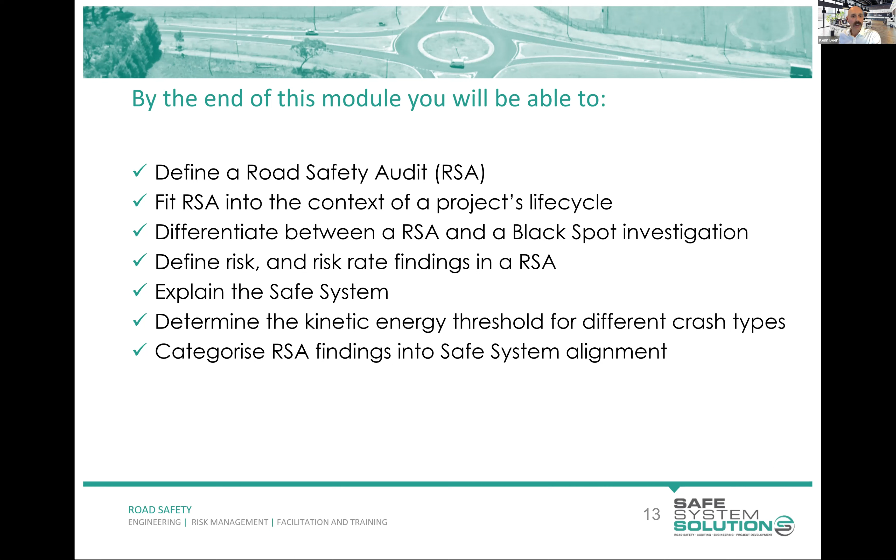Yeah, we're going to get into a bit of risk rating in road safety audits, and talk about the safe system, which I don't need to spend long on with this group because we have had a good discussion with many of you about that, and New South Wales government's done a lot of work to get safe system theory out there. But we do need to delve back into kinetic energy thresholds and management in road safety auditing. So we'll just recap some of that.

Okay, so this course is based on the Austroads Guide to Road Safety Part 6. There was a release of a new Part 6 last calendar year, late 2022. I was the technical advisor to Austroads on that document. And so we did reshape a fair bit of road safety auditing practice, and it's filtering into New South Wales practice and supplements for New South Wales. And I'll take you through the process in its contemporary form.

There are lots of old superseded ones. You may have them around in your offices, although most people are paperless office style these days, but you might recognize some of those documents.

So this course meets the Austroads requirements for a road safety audit course in terms of the content we cover, and as I mentioned, has been approved by Transport for New South Wales and Queensland Department of Transport, Victorian Government, and South Australian Government as well. So you will, with successful completion of this course, be eligible to be a registered road safety auditor across any of those jurisdictions, and I'll explain that later.

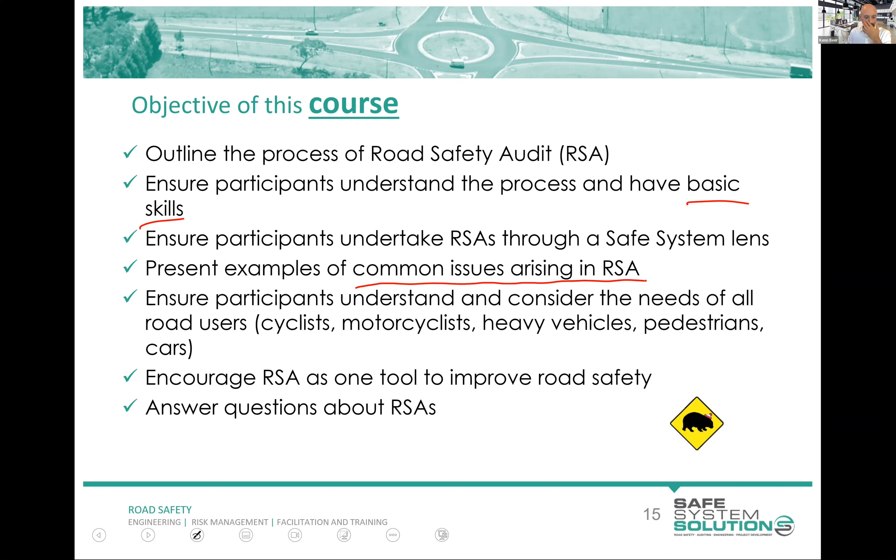We're going to think about all road users: cyclists, motorcyclists, pedestrians, cars, heavy vehicles, scooters, people in wheelchairs, the lot. We're going to think about all of our road users. And we're going to encourage road safety auditing because it is a great tool, and we're going to answer your questions, and we're going to talk a little bit about auditing as one option we have in the wide spectrum of things that can inject safety into our projects or our existing roads.

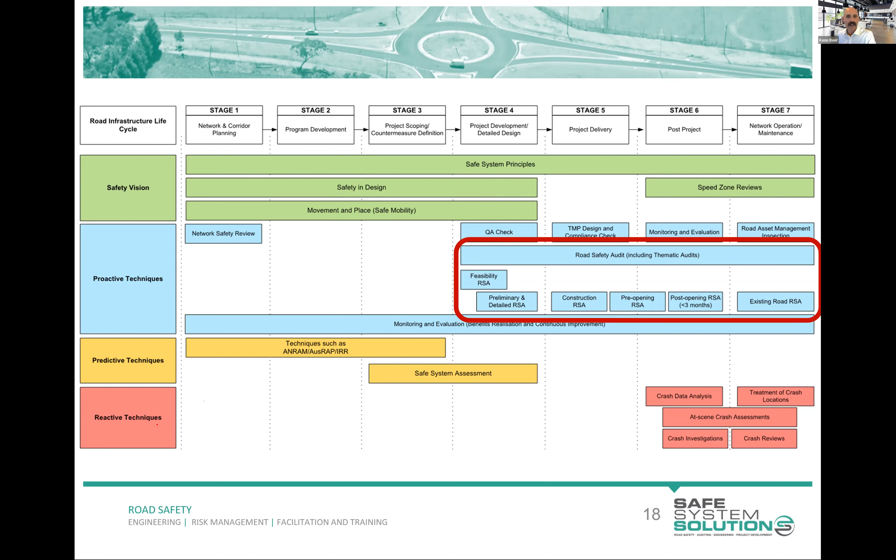Okay, so road safety auditing sits within this proactive technique, and we're going to run through a fair bit of that. Now, I've got a group here, and I know some of you have quite a bit of experience and knowledge in road infrastructure planning and management and design and the like. So some of you will be aware of this, but it may be a little bit new if people are new to the idea of road safety auditing.

A road safety audit is not a standards review. So the word audit naturally conjures up images of financial audits and these sorts of things, doesn't it? And this rigorous check of compliance with the documented standards or codes. But that's not what a road safety audit is. A road safety audit is a holistic look at safety, regardless of whether we conform with standards and guidelines or do not conform with standards or guidelines.

And the reason for this is really, I suppose, this. Standards do not necessarily equal safety. So meeting the standards and guidelines does not necessarily guarantee safety. Why is that? Well, one reason for that is that our standards often have risk built into them for one reason or another. Okay, so there's that. The second one is that standards and guidelines come together out there in the real world, and the combination of standards can present a risky scenario. So you may have one thing that meets standards and another thing in there that also meets standards, but by those two being in there, we get a dangerous situation.

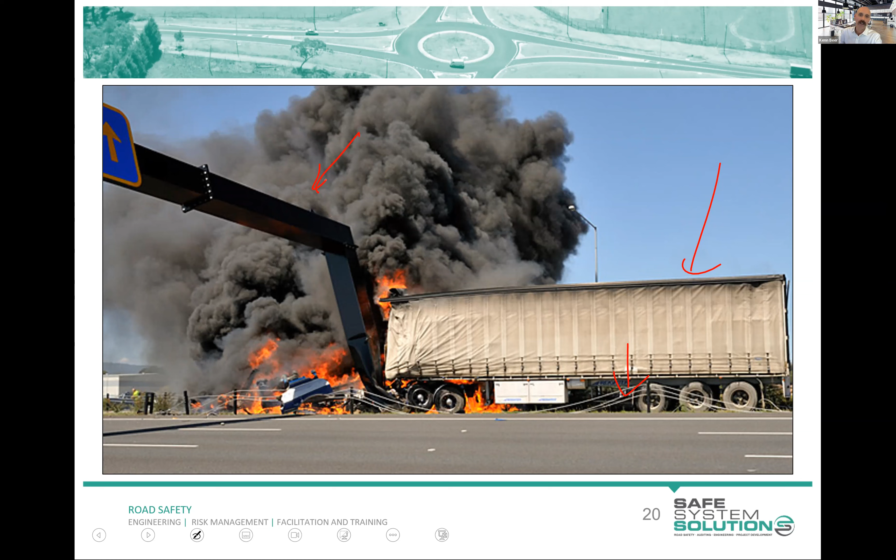Now, things like this flow on. So since this incident, there have been changes to guidelines. That takes many years. And we do now have some upgraded standards and guidelines around this. So hopefully we won't see designers designing this, but you're going to be there as auditors to try and pick the next ones. So that's actually the test vehicle there. That's the large vehicle that crashes into the wire rope system.

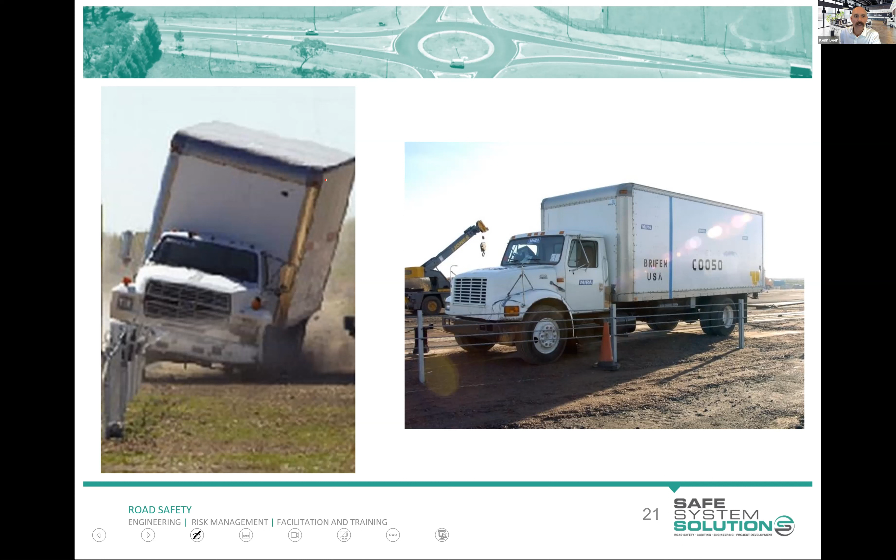Let's have a look at another one here. And this is, I should say, choosing the wrong containment level or an inappropriate containment level for a barrier system is quite a big finding in a job with barrier systems.

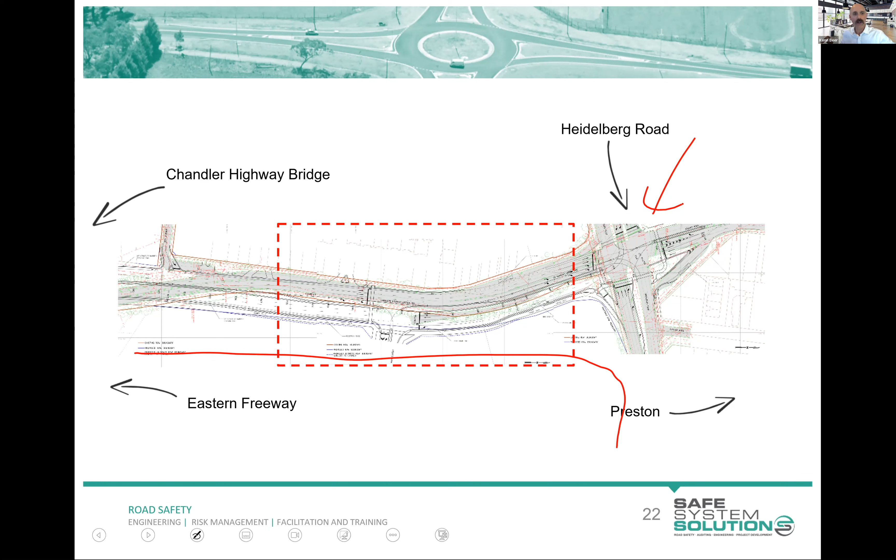And I'm going to zoom in a second. Here we've got an intersection up here, existing. We've got a bridge down there. There's a new duplication coming in as well. So let's zoom in. And this is a new signalized intersection being created into this development. And so this is how it's all being designed and set up.

This is a car. So let's have a car driving along in a 60 km/h environment. Maybe they're going a little bit faster than that, and they continue on straight because they want to go straight, and they're in a turn lane. Okay, so this is what we call a trap lane, and some of the naming of features, I think somebody deserves awards for these, because trap lane is the most perfect description of what that is.

And you're driving along, and all of a sudden, the lane you're in, where you just want to keep going straight, turns into a turn lane. We absolutely know that we're going to have rear end crashes and side swipe crashes occurring along here, as people attempt to get out of their lane at the last minute, attempt and then can't, and then crash into the back of a vehicle. We know this.

The Austroads guidance and jurisdictional supplements do not quite go to the point of absolutely mandating you cannot have a trap lane on the network. Trap lanes, they're discouraged, but they are there. Very occasionally, a trap lane is intentional, that you want vehicles to make a turn, but that's almost never.

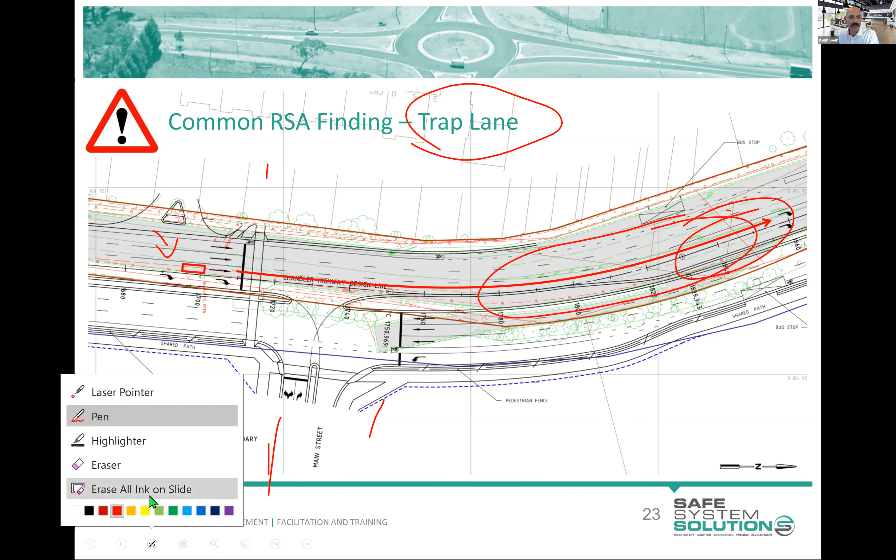So here's another example of where we as road safety auditors play a role at, one, identifying the issue, but I'll tell you now, the designer would have known that there was a trap lane. So it's not going to be a revelation to them that you've identified their trap lane. But what we have there is the ability to risk rate and to help with ways to hopefully lessen this risk.

And as a road safety auditor, I'm always understanding of all of the constraints and challenges that the designer and the project manager have, and it's a huge challenge. You're trying to design something like this, and you're going to have cost issues, traffic modeling challenges, land acquisition challenges, services to deal with. You might even have cultural heritage, native vegetation issues, and the list goes on. So what we're here to do is provide advice, identify issues, and try to help the designers and the project managers along their journey of identifying risk.

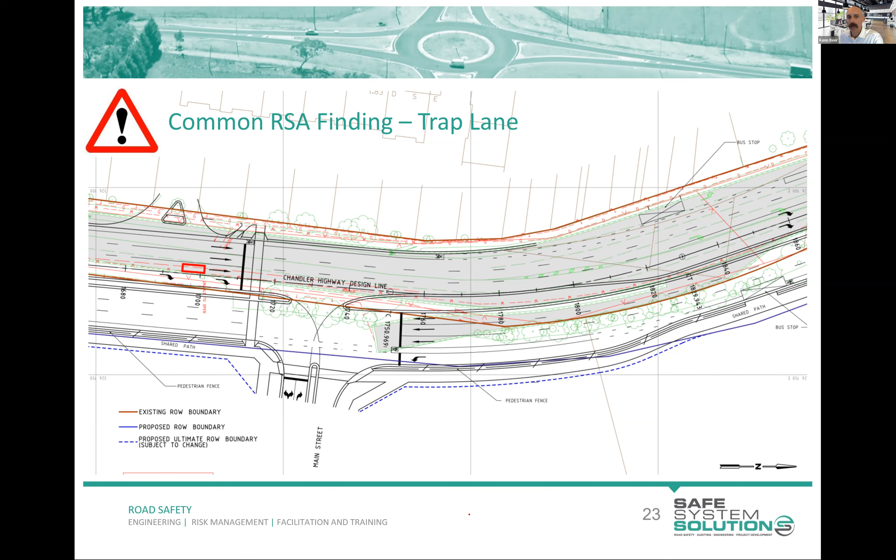Okay, I'm going to play a little video here, and actually this is probably not going to play on my computer, so I'm going to stop sharing that, and I'm going to jump out to another screen to share. Oh, you're going to get it. That's not what we want. There it is.

I'm going to play a video here, and it's of a crash that occurs. What I'll be asking you to do is have a look at the road and roadside environment and tell me things that may have influenced the chance of this crash happening. So that's in the physical infrastructure around and the surrounding environment. I'll play it a few times. I just want you to start to think a little bit like an auditor. What do we got built out here that's causing some of these challenges?

So hopefully that banner will drop away. Okay, we'll look at the back of a dash cam. We'll go to the front in a second. I'm going to play it again, just so you're able to watch it a few times. Hopefully it's streamed through for you.

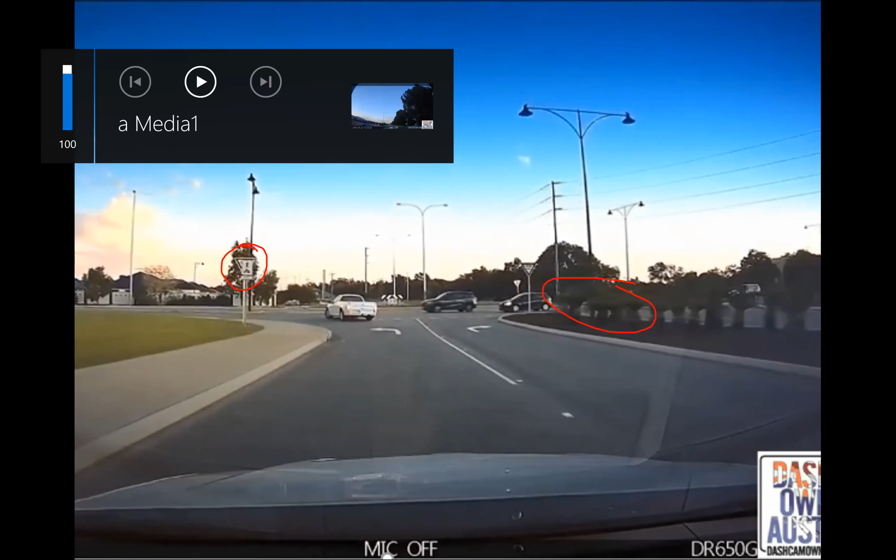What's the color of it? It's dark. Sorry, what was that? It's black, isn't it? Color. It looks black in comparison. The one in the vegetation is black, but the others are silver. Oh yeah, yeah. So it's a different type of lighting system, it looks like. So I think that, yeah, we'll have a chat about that one shortly.

Something in the chat has sparked my interest from Dan. It says gives a perception that the road continues straight. Now that is, I suppose, a road safety audit style thing. Everything that's been said so far, road safety auditors will absolutely pick up. But the visual deceit of this intersection, and visual deceit is a term we use quite a bit as auditors, the road has the characteristics that look like it continues on through.

The presence of the lighting and the power poles in their continued run down here is just accentuating what a road user will never be able to articulate to you, but is in their subconscious, that this road continues straight without control. And they may recognize that late. So I feel there is a chance that this white ute driver recognized too late that at this intersection they actually had to give way. Maybe they thought it was further on, or the configuration has made that an overshoot issue.

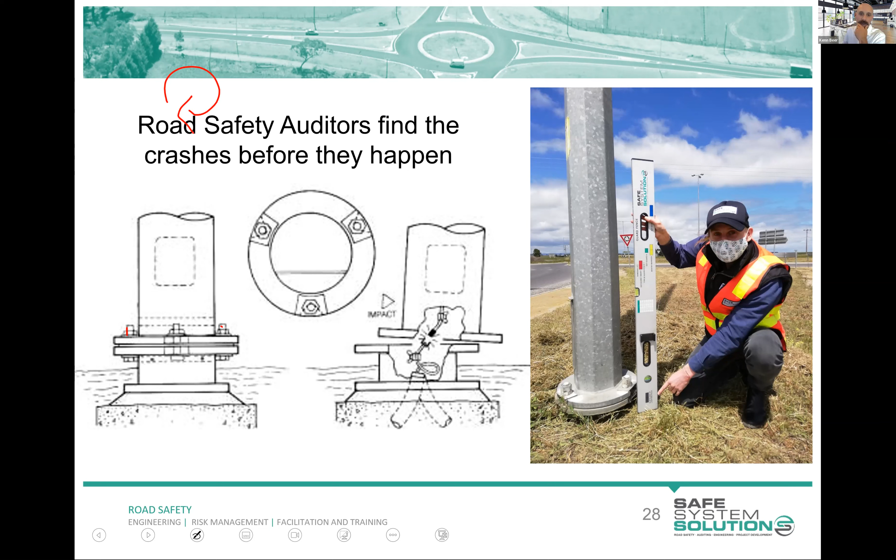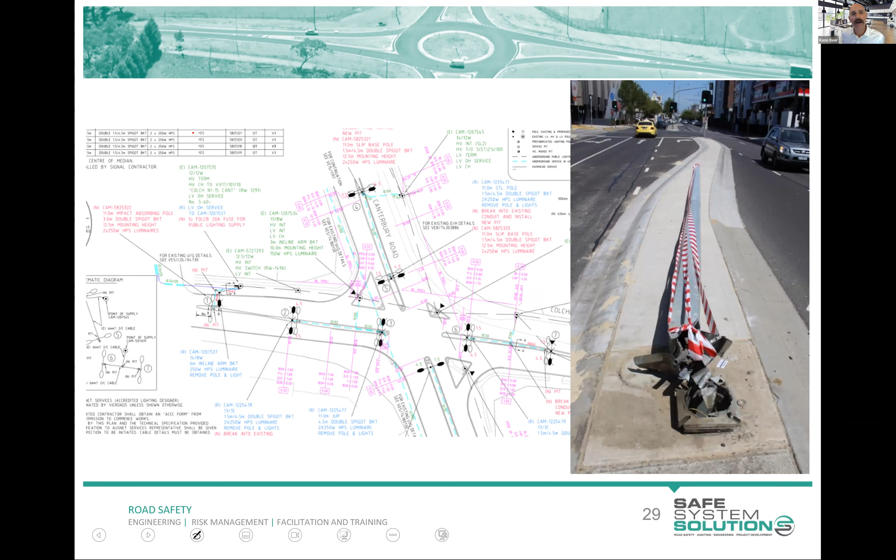And as a road safety auditor, you may get plans and designs that have lots and lots of technical detail, and you might get the lighting plan, and it might have a whole lot of new light posts and poles going in, and some of them may be slip-based, some may not. And you're determining, is that appropriate or not? Now, hypothetically, if they were to put a slip-based pole here, and you were looking at this as a design, not an existing road, what as a road safety auditor might you say there?

I mean, they're obviously trying to lessen risk by making it a slip-based pole. So if a driver leaves the road and hits that, it breaks away and it doesn't send all the energy into the vehicle. But has anybody got any thoughts on, as an auditor, what you might say to that? Well, the top broke off and that created another hazard in itself. So the structural assessment of that pole hasn't held together. So all good designing half of it down the bottom, but you look at the whole picture.

Yeah, that was an interesting one in that video, wasn't it? I've never seen a slip-based lighting pole that has that configuration. So I don't know whether it was intentional or unintentional in the design, but it was very interesting. I'll agree with you there. Certainly in most slip-based poles, you wouldn't have the top do that.

Okay, so Bridget is on the board there with a good one. You can have a prize for the idea of, what about if it falls onto power lines? Or what about if it falls into areas with high pedestrian activity and the like? And I see a few people have added to this.

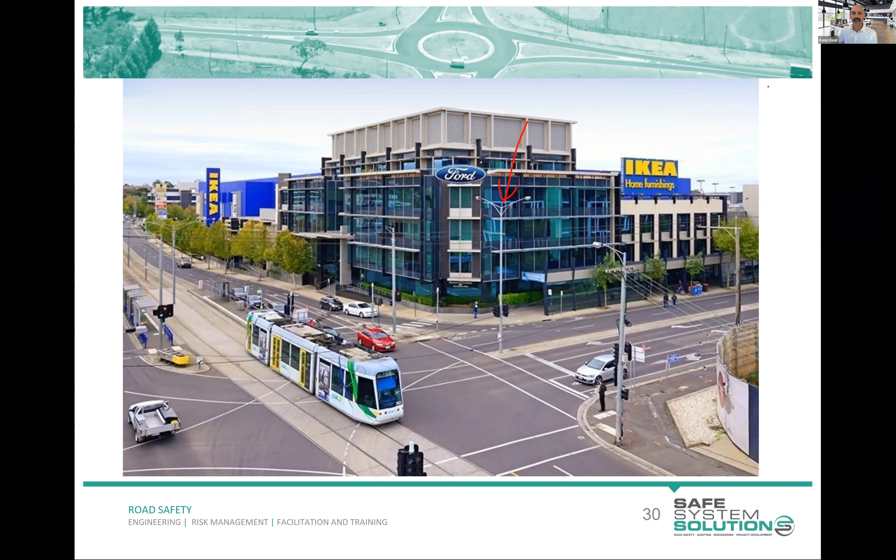And there is another type of pole that we categorize within the suite of frangible poles. And it's a lighting pole. There it is. Actually, I'll give a prize if anybody can tell me what the name for this one is. So I talked about slip-based. And remember, these are both types of frangible poles. And this one is... Yes, collapsible is a good guess. It's actually termed an impact absorbing pole.

And they also are frangible, but they contain a vehicle with an envelope, and they don't quite operate the same way. It's a bit more of a contained crash. And then you're moving into rigid poles. So the rule of thumb is: low speed environments, rigid poles, fine, especially if there's pedestrians around. In medium speed environments, these are the better option for that containment, and in high speed environments, slip-based poles.

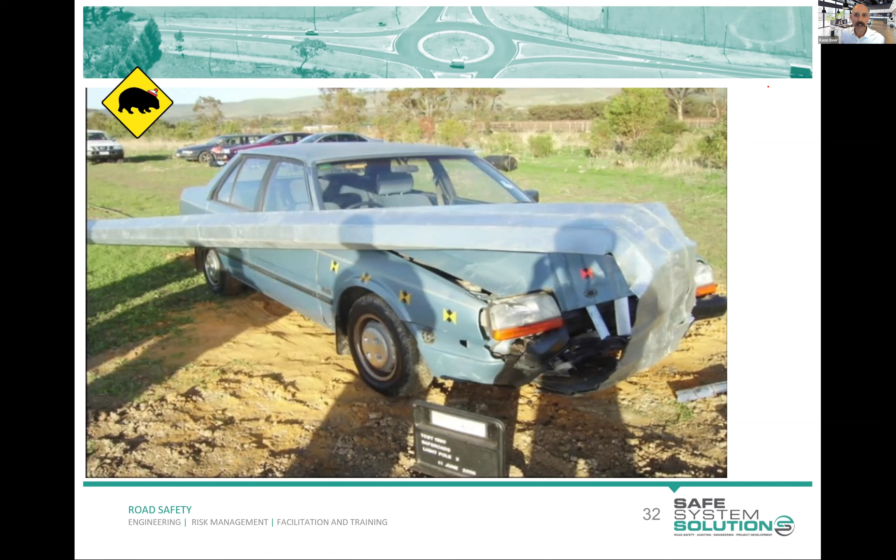And as a road safety auditor, this is a common thing that comes up. So thinking about where they will fall as slip-based ones. And then, as you can see, Max, one of our senior road safety auditors there, doing a post-opening road safety audit of a newly constructed roundabout. Checking the height is an important thing as well for existing ones, because if they're too high, vehicles will snag on them. They lose all of their benefit.

It's not going to shear. If they're too low, it's not as bad, but it just doesn't get as much shearing as we would like. So having a look at that specific height and checking it within the tolerances is an important thing. So you may see a few of these pop up in the slide notes. And in the learning management system, you have a PDF copy of these slides, and you could click on that and get a little bit more information, sometimes a video on this specific topic if you are interested.

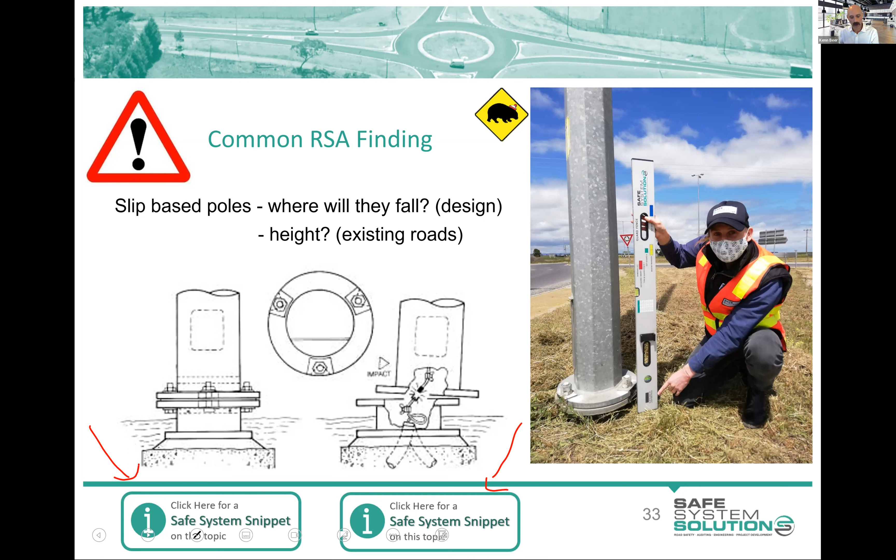So another common misunderstanding around road safety auditing is, I'll just check the chat. I see a couple of things might have come in that I may have missed. Some good answers in there, thank you.

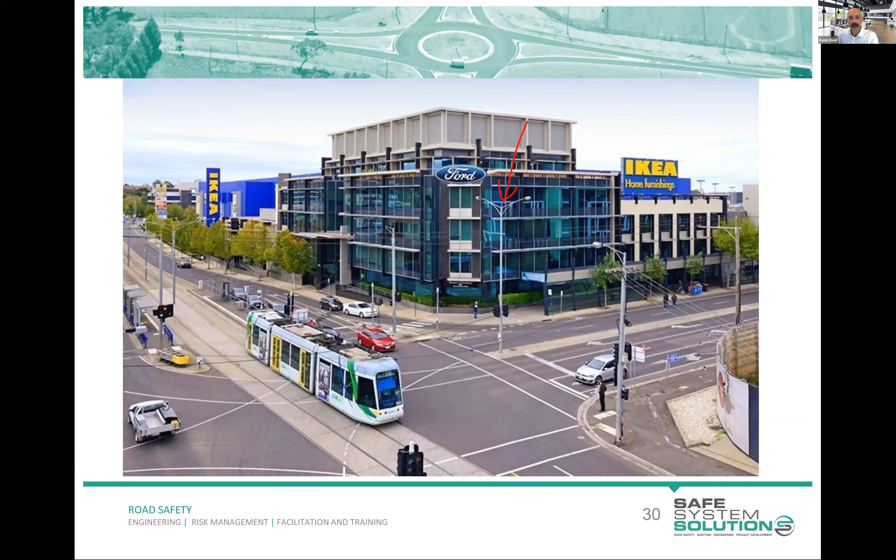Yeah, so wouldn't you add barrier curb? I think that's a decent comment that's come in there around added protection, where you've got the slip lane in an urban environment. It looked like it was a mountable curb from what I could see, and maybe should have been a barrier curb, just for that added protection. Yep, that would certainly add a bit of protection and a bit of redirection as well. So I think those sort of things are good, and that's the details of what auditors can be injecting as ideas if you're in that space.

So road safety audit's proactive, black spot investigation is reactive. If you are analysing crashes in detail and looking for crash trends and doing crash matrices and crash diagrams and all of that, you're doing a black spot investigation. And that is a good process if you have an area with a significant crash history. If you have an area that doesn't have an extensive crash history, or it's a brand new scheme, the crash history is somewhat irrelevant.

So it's currently a give-way controlled intersection and you're making it a roundabout. Question that comes up is, well, what relevance is the crash history then? Because we're trying to think about when it's a roundabout, what are the issues and what are the crashes? And the question often comes up, should you look at crash history as part of a road safety audit? And the answer to that is, it is up to you. People often don't like that answer, but it is up to you. Because Austroads doesn't suggest one way or another, nor do any of the jurisdictions really. It's just how you want to operate.

But what everybody is clear about is that it shouldn't be driving your identification of risk. Because if the crash history is driving your identification of risk, then you're doing a black spot investigation or a crash reduction study or the like.

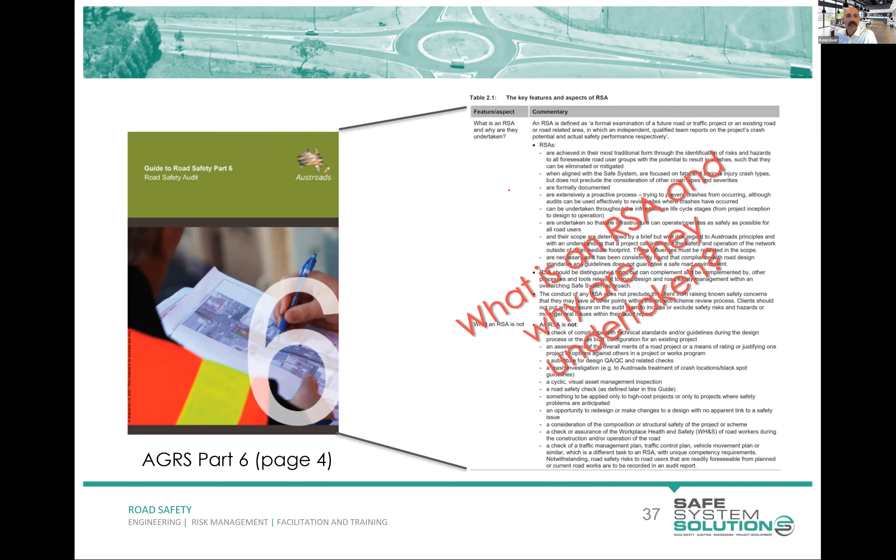What is a road safety audit? I'm going to move through some of these slides a little bit quicker to get us to a point where I can give you a little assignment to do. The Austroads Guide to Road Safety Part 6 defines it with a whole page of text, which I'm not going to read to you. What I want to take out is this. A road safety audit is a formal examination of a future road or traffic project or an existing road or road-related area in which an independent qualified team reports on the project's crash potential and actual safety performance.

Some pretty important words in there. Formal, okay? This is a formal process. You go through it, you follow the steps, and you use established documentation, protocols and the like. We can do it on future or existing roads, so designs, or the existing road environment, or road-related areas. So it could be shared paths, it could be car parks, these sorts of areas as well.

You need to be independent. By independent, we mean you can't be the designer, you can't be the project manager, and you can't really be somebody who is overseeing, even at a higher level, these particular projects. But it doesn't mean that you can't undertake audits of roads that you are managing. So if you want to do a road safety audit of an existing bit of Transport for New South Wales roads and gather a team together, you can do that and just follow the process. Or you could do road safety audits of Transport for New South Wales projects as long as you weren't the designer or the project manager.

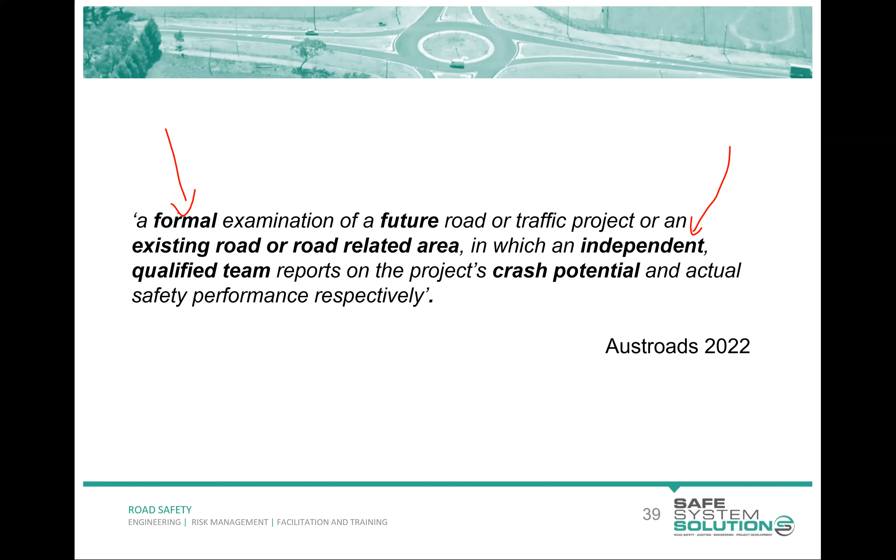Now, Blair's got a hand up on this one. Oh, you just answered it. Even if you're from the same organisation or company, can you do road safety audits on that company's projects? As in, we can do our own audits, but as long as we're independent to that project.

Yes. So this is one where Austroads has always delicately tried to say it, and the latest release of the guide has been a little bit stronger, but I'll just say it the blunt way: for government, local government, state governments and the like, everybody's happy for a Transport for New South Wales audit team to audit a Transport for New South Wales design job, as long as they're not the designer or the project manager. When a big or small ABC consultancy did the design and is also doing the audit, everybody gets a little more nervous.

Now, I generally hope, and I think, that most of these consultancies have the integrity and they're not being compromised in terms of time frames or pressure from other areas. But that one's a little more discouraged. It's generally seen as perfectly acceptable for the road controlling authority to have internal processes and practices of road safety auditing. Okay.

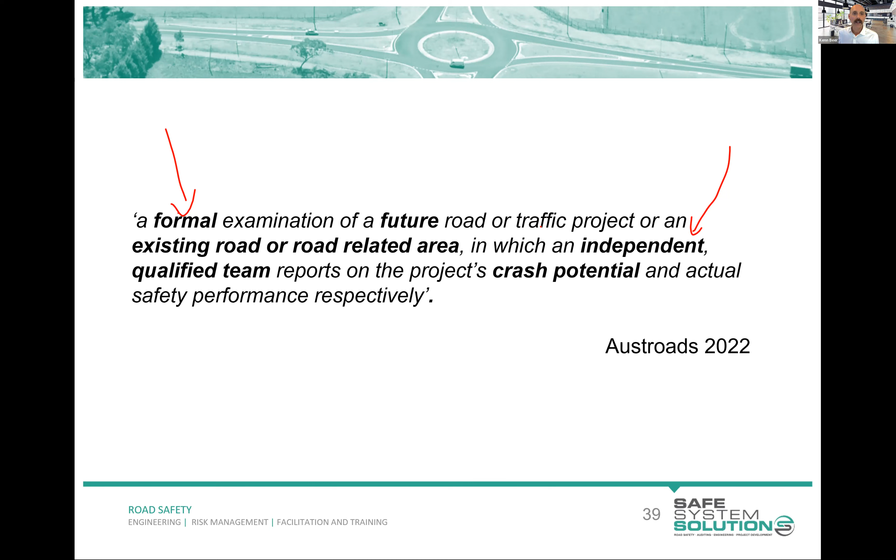So the safe system, and I don't need to spend long on this because you're so aware of it, but we think of safe system principles when we audit as well. A safe system assessment and a road safety audit are coming closer and closer together, because we are obviously thinking about people making mistakes. We're going to try and minimize those through identifying things in designs and in the existing road that cause those and eliminate them. But we are thinking about the severity of crashes, the human body and its vulnerability, and all of our shared responsibilities.

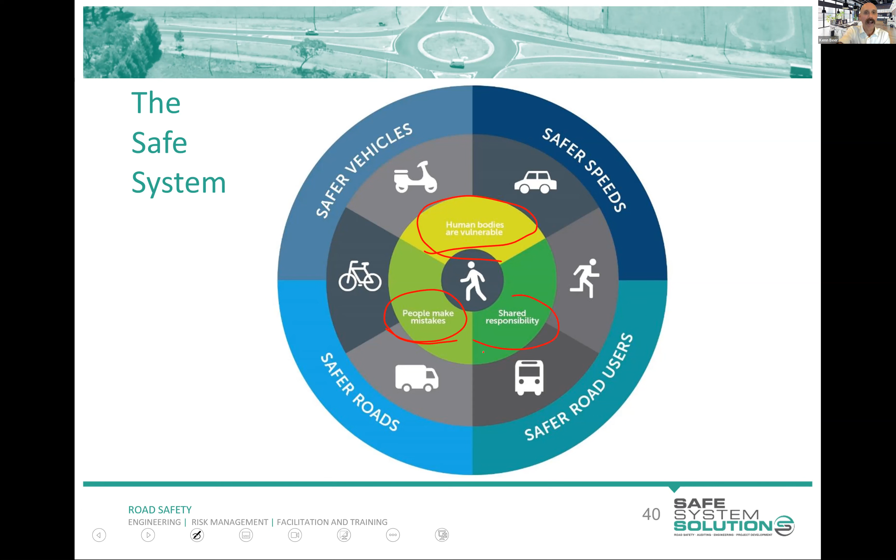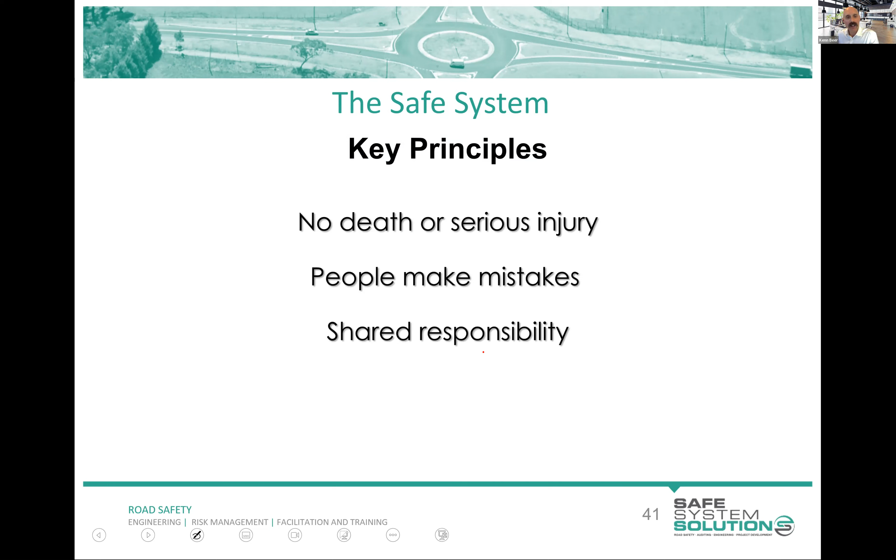So we have that aspiration of no death or serious injuries. We know people will make mistakes. We'll try and minimize those, but we need to manage them as well. We've got the shared responsibility, and people are vulnerable.

Now, I want to see if I've got a quiz here, because it may or may not come up. Oh, gee, it does. Fantastic. Remember, you don't get marked on this, and hopefully that's going to come up on your screen. Tell me if it is not. I've got it. Okay, good.

It's coming up. Now, you're not marked on it, but this is just a little pause for us to recap our thinking. And then the last question you got in the Safe System Assessment course, but I'm asking it again just to see if we are all on the same page still. I'll give you a couple of seconds to do it.

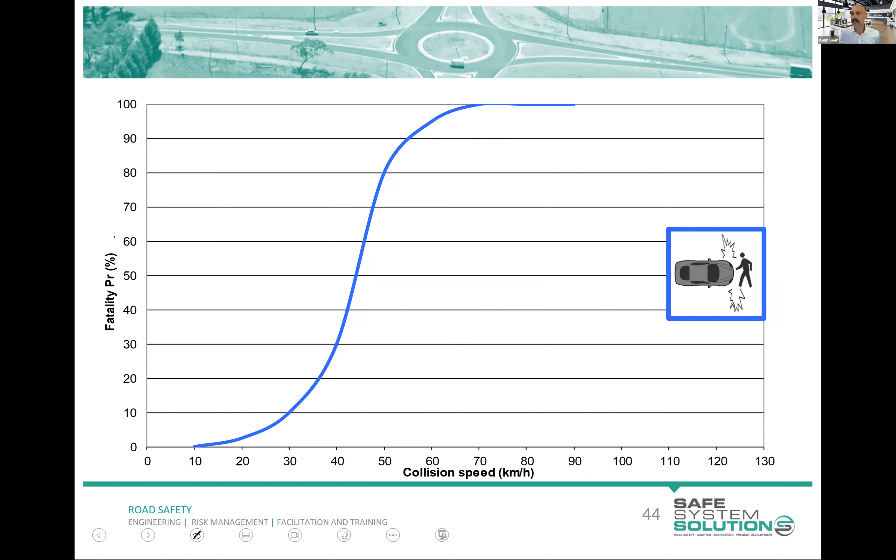Lost my PowerPoint. Clicking along, and that's not going to work either. Sorry.

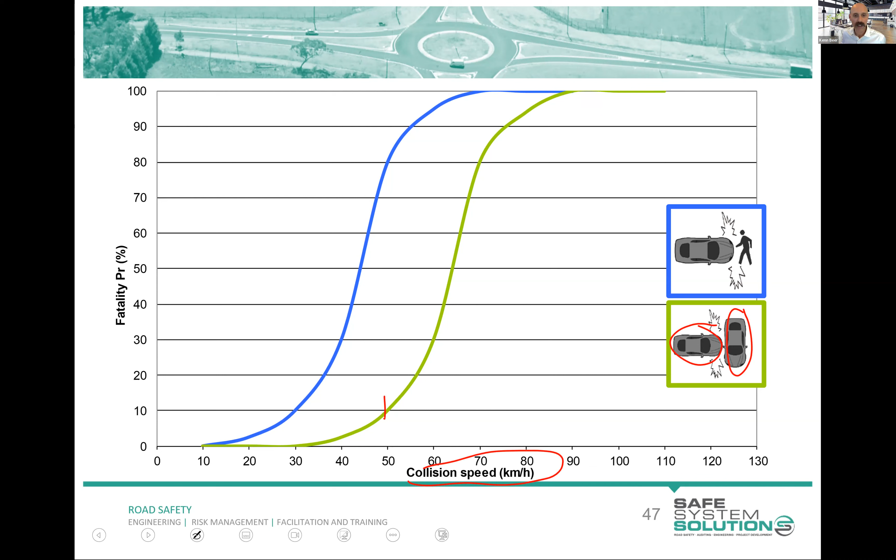I'm going to carry on here because I have taken most of you through this before, and others have as well. We have this information for side impact crashes: bullet vehicle speed, target vehicle, a bullet vehicle speed down here. We see somewhere in the order of 50 kilometers per hour. Things go really bad when that bullet vehicle is going faster than that and hits the target vehicle. We have a dramatic increase in the deaths of occupants there.

And for head-on crashes, we see that 70 kilometers per hour is a real kick-up point in terms of both vehicle speeds. Check out the safe system snippets on this if you want further info and you want to analyze it a bit more. There's some good stuff there.

But in road safety auditing, where we really find ourselves less like a safe system assessment, where we're trying to attribute a scale of 0 to 4 on how severe incidents might be, we do a bit of that thinking, but we also sort of flag these threshold speeds. And that's the 30 kilometers an hour where pedestrians and cyclists are there, 50 kilometers per hour where there's side impact possibility, 70 kilometers per hour where there's head-on ability, and us looking to be below that.

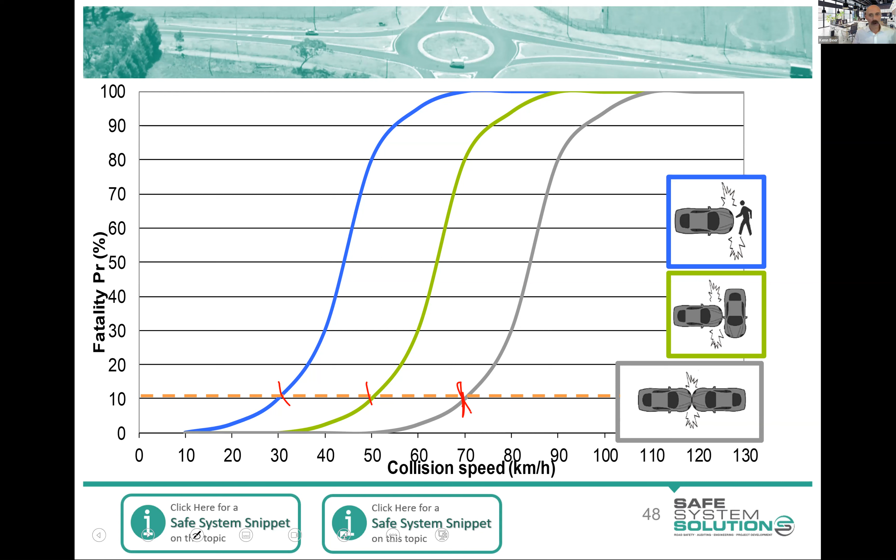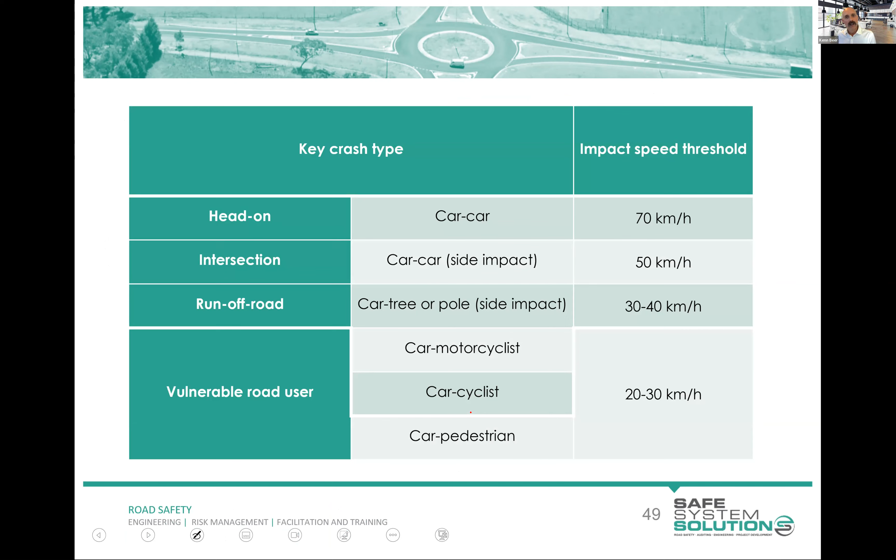And there's a bit more here in terms of impact speeds and the crash types, which may assist you. And I'll give you a little bit of, I suppose, calibration on that. Just putting my little New South Wales disclaimer on that one.

So the old model, which was essentially identify hazards and assess risks, and maybe draw a line there for New South Wales. The new model is identify risks, assess the risks, consider safe system tolerances that we just looked at. And then if you're in a jurisdiction that's making recommendations, you make your recommendations, but you give an indication of how well they will get us to our safe system aspirations and how effective that treatment is.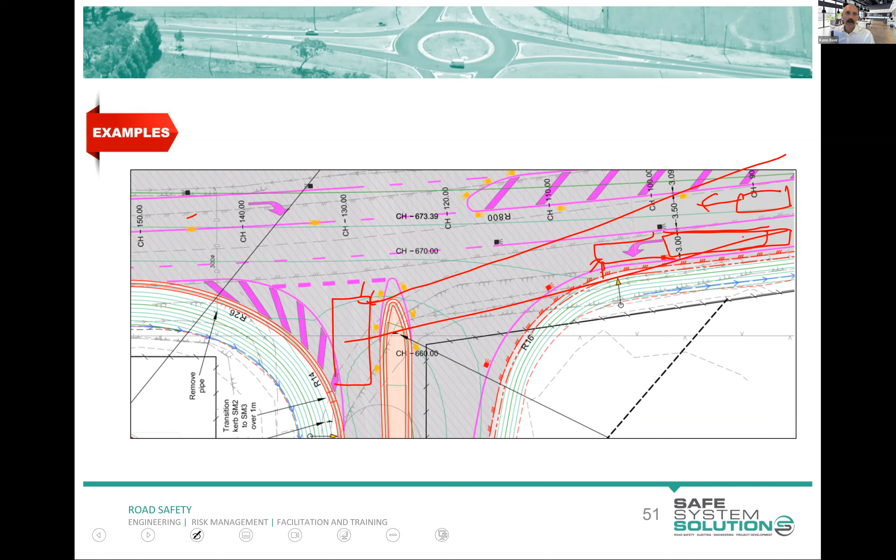So here is the write-up of that audit finding. It says, for the intersection, blah, blah, blah, vehicles using the left turn lanes may create dynamic visual obstruction for motorists at the hold line looking for through vehicles. This increases the likelihood of right-through side impact crashes involving vehicles turning out of the side road.

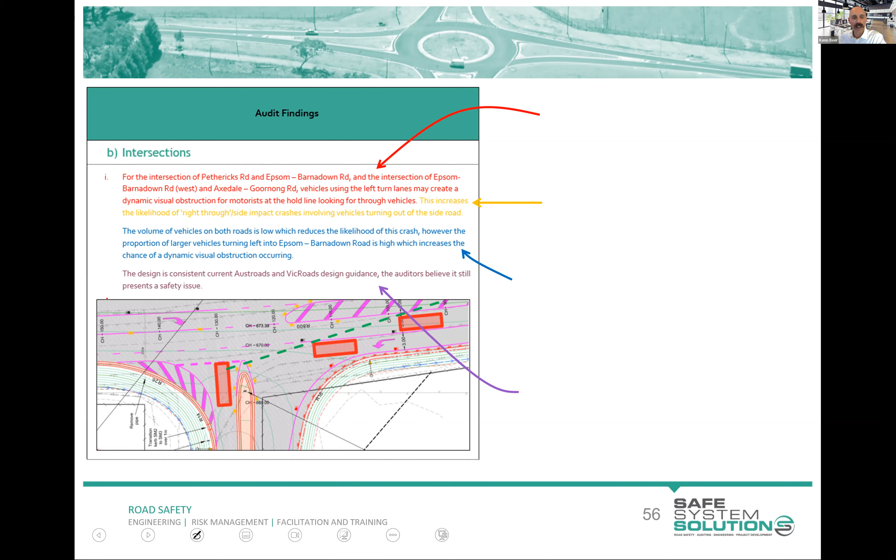So here is the recipe for a good audit finding, okay? And I'm going to break it down for you. It's only taken me 15 years of teaching this course to actually make a formula or a recipe out of this, because I wanted it to be quite clear to people as to what makes up a good audit finding. Of course, experienced auditors will often deviate from the set formula, but most of the time it's a really good way to go. You explain your issue.

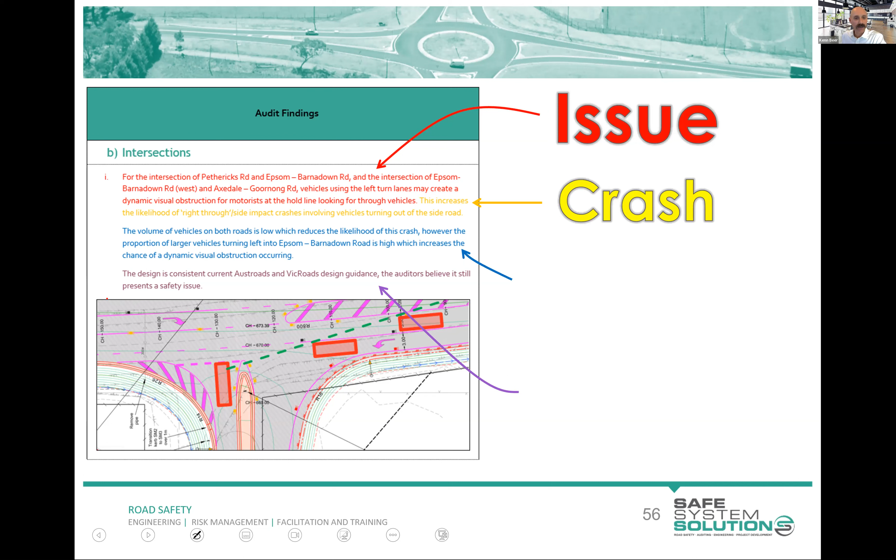Then you actually specify a crash that could happen. You might even want to use a RUM code in there to say, that's the RUM code I'm particularly worried about, but you spell out, you articulate the crash that you're worried about. You then talk about any particular factors that may increase or decrease the risk.

And then if there are standards or guidelines that are applicable, you can put commentary around that in there. Either this doesn't meet standards or guidelines, or this does meet it, but we're still concerned, or you may just not have anything there at all. And then also, if you can put a picture or a snip of the design or something to make it very clear, that's a really, really beneficial thing to do in a road safety audit.

That is just, for those who have received road safety audits in their time, having that little diagram there is just wonderful. You just go, oh yeah, I know exactly the spot they're talking about. I don't have to read 3 paragraphs and look at my plans and go, what chainage are they talking about? Which are they talking about, the south leg or the north leg? It's there, it's easy, you can see it, there's no confusion. And it's really helpful. So we've got all of that in there.

And I want you to sort of come back to this when you're writing up audit findings during this course. Because I tell you now, markers of your audits will be marking using this as well. They'll say, have they clearly identified the issue? Have they specified a crash type? Have they added any risk factors? And then, is there any standards or guidelines they thought were applicable?

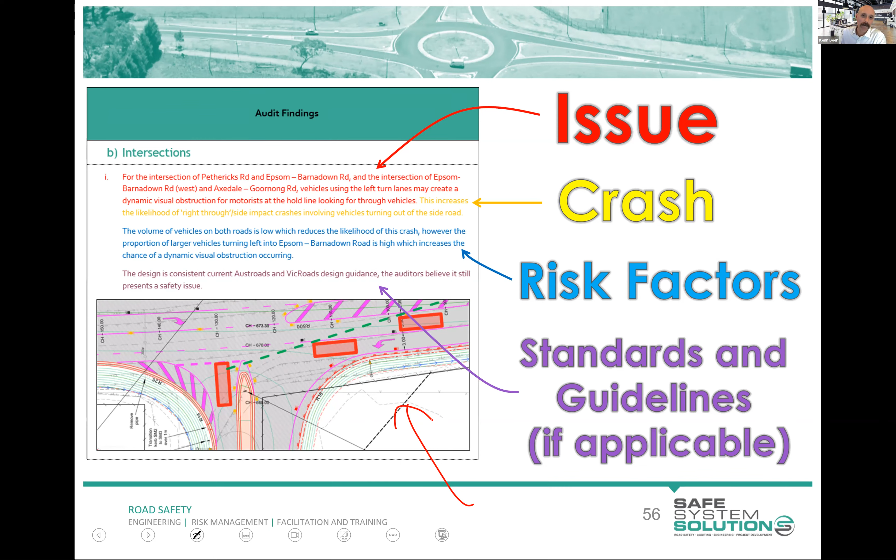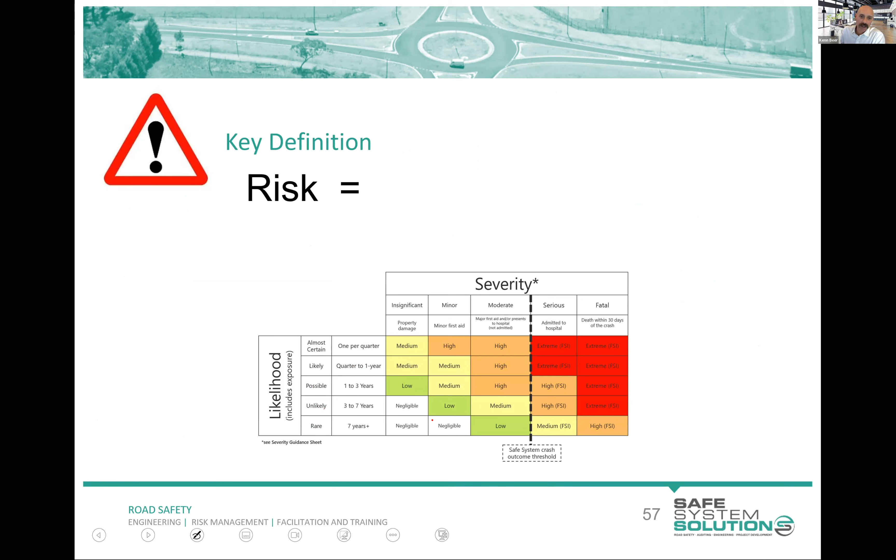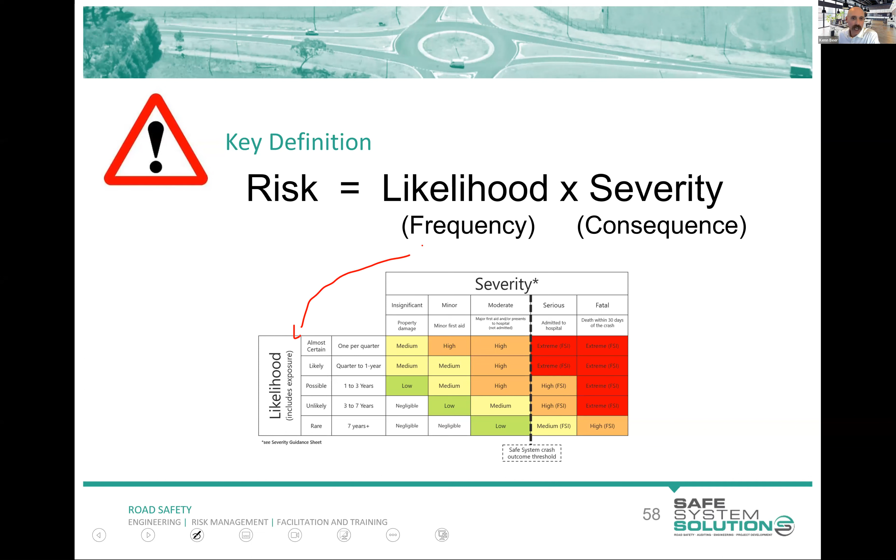So then you've got your finding and you go, right, what's the risk of it? So the risk is the product of the likelihood of the crash happening and the severity of the crash. Now, in safe system assessments, we had this exposure, which you'll see in the risk diagram here, straight out of Austroads' guide. Its likelihood includes exposure. So what's the chance of the crash and how bad is it going to be when it happens? And we use this to identify our risk.

So we say, what is the chance that that vehicle will be doing the left turn, the large vehicle, that there'll be another vehicle masked, that there will be a vehicle trying to turn out at the same time, that that vehicle turning out won't wait because they can't quite see. And we sort of hum and ah about, is all of that going to come together once every 10 years, or is it going to happen every few months?

And then we ponder, okay, well, when that happens and they're struck, are we talking about it being property damage, or are we talking about it being fatal, or is it somewhere in between? So for this one, it's decided all of those things lining up and an actual crash happening out of this is rare. The severity is serious. The resulting risk is medium.

And as you would have noticed here, there's a line. Risks to this side of it come with a little FSI, fatal serious injury. Use FSI or KSI in New South Wales? You use FSI too, I think. FSI. Yeah. Some jurisdictions use KSI sometimes. But yes, FSI. You can see here on the left, we've got sometimes the same risks, but without that FSI label with it as well.

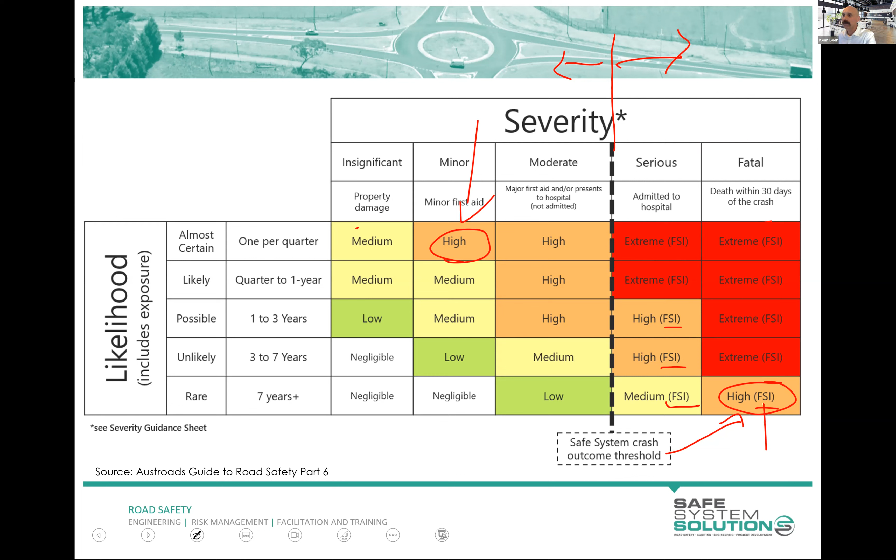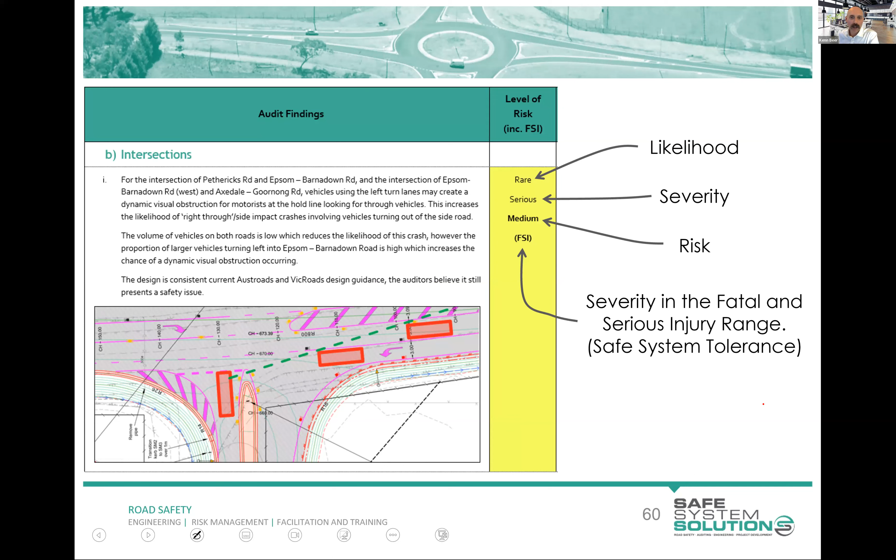I better move on so we've got time for me to talk you through the assignment. So then we go into our recommendations, and this one I don't need to spend long on, as I said, because it's rightly pointed out that New South Wales is not a jurisdiction that makes recommendations. Other jurisdictions, I do want to quickly show you what is done, because technically you can get your certificate and go and do an audit in Queensland, and they will want recommendations.

And we do our recommendations, but we also categorize those recommendations. We actually use the categorization out of the safe system assessment framework, just to be ultra confusing here. But it's that primary treatment, which virtually eliminates the crash potential, versus a supporting treatment, which is going to reduce the likelihood of crash or reduce the chance of this happening, but it's not going to virtually eliminate it. And in this document, 509-16, you'll find lists of treatments and where they fit into these categories.

We will give you practice doing this. We have a quiz around it, and I am going to get you to go through it. It's a helpful thing to do because it starts to help us understand that some treatments that we do really aren't going to give us transformative change in terms of road safety outcomes, whereas others are.

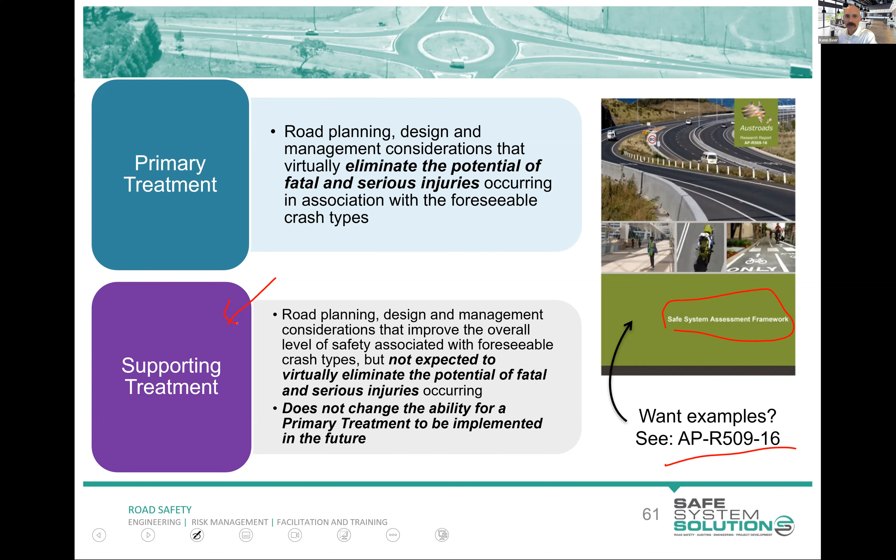So here we go. In a jurisdiction making recommendations: implement measures to reduce the speed and/or angle of impact at this location. This could be achieved with a roundabout, primary. If this cannot be achieved, implement measures to improve sight lines at this location, such as increasing the offset of the left turn lane, supporting, relocating the hold line forward, provided that it can be done so safely.

So I think if more people had been taught how to write up a recommendation in this way, I think New South Wales would still be doing recommendations, because you can see that this is not just build a roundabout, because we know that for the local council here, the odds of them being able to afford a roundabout at this location are very slim. Right? They've probably thought through that. They've come up with this because that's the funding they got or whatever it is.

There is a chance, though, that maybe they're thinking there's still a chance at a roundabout, and this helps them in that case. But we said here, if you can't achieve that, here are some other ideas. So it can be very useful there to help get some ideas and some thinking.

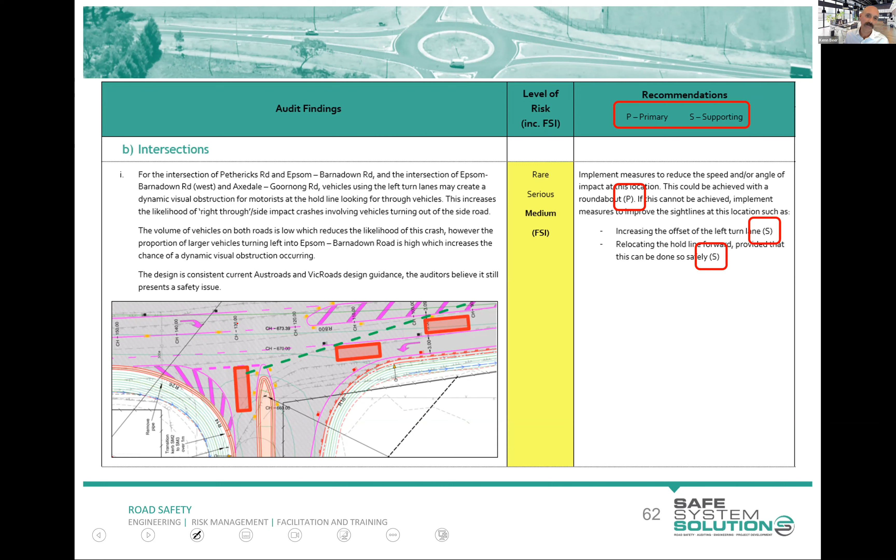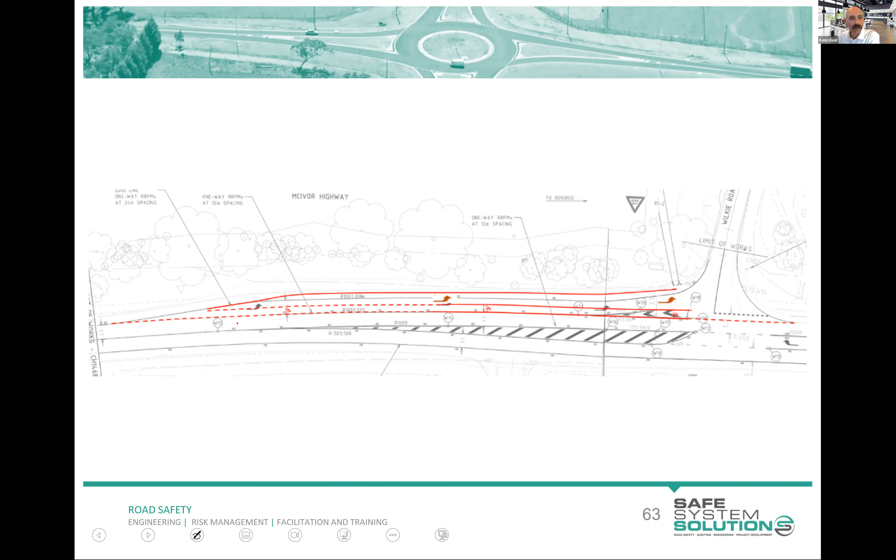Another audit we were doing where a similar issue came up, we actually recommended including that offset, but actually creating a bike lane through there, because a few bikes were seen during the site inspection, and as opposed to just chevroning it out, it actually fit together quite nicely to open sight lines and provide a little bit more space there. The cyclists would have probably used the chevron area anyway, so probably not that different, but it worked quite well.

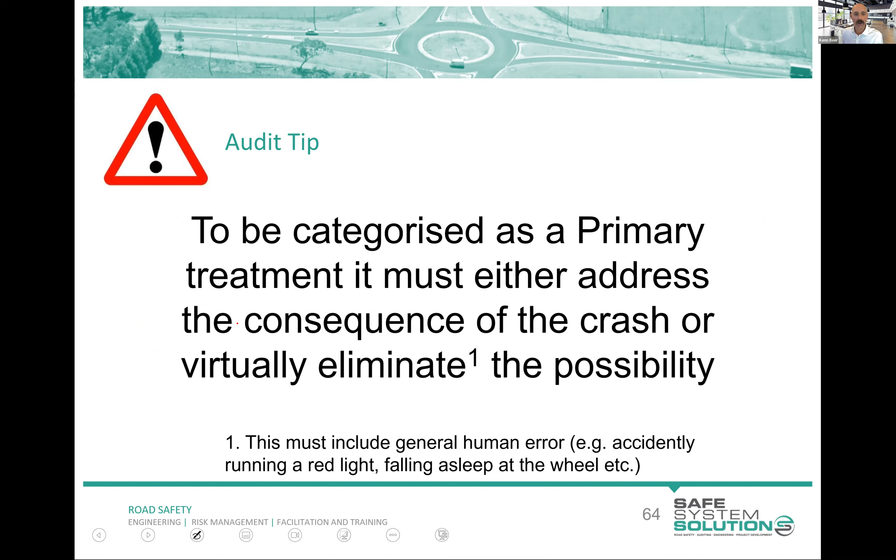Really, for things to be a primary treatment, you're going to have to address the severity of that crash, the consequence of the crash, because to virtually eliminate the possibility of it is highly challenging unless you're completely blocking off turns or closing intersections or doing grade separations and the like, because we need to account for human error.

In a lot of jurisdictions, every other jurisdiction, you'll have this table, you leave this bit blank, and then whoever receives the report writes what they're going to do. I do know in New South Wales it's often a practical tendency, and I've done this in the past for New South Wales audits I've been involved in: you do your audit, you identify your issues, you don't provide recommendations in the report, but they ask you to provide a separate memo with all your recommendations anyway. So you go, okay, that's okay, but it's just semantics really.

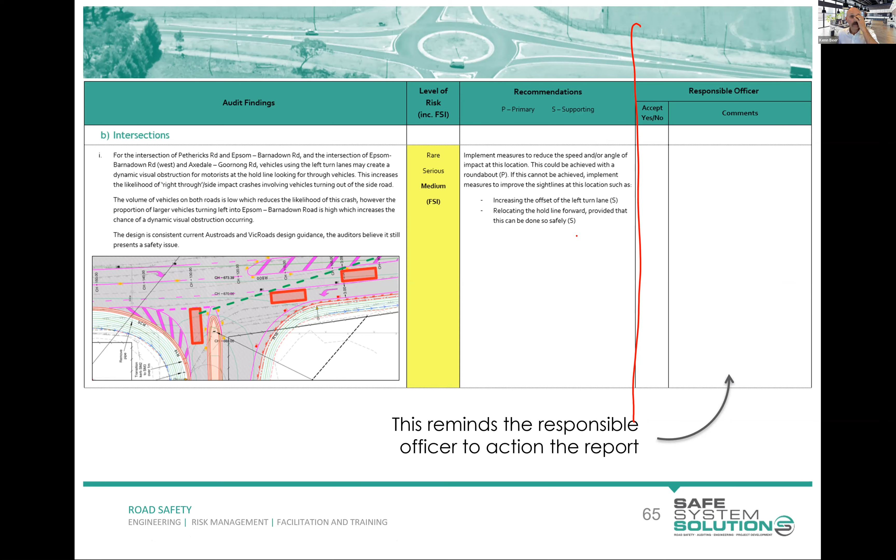Okay, so another example here. This is another one just showing again. The diagram's great, isn't it? Like immediately I'm going, okay, 2.9 meter wide right turn lane. Yeah, okay, I kind of know what the issues are already. I can see exactly where it is. So I don't need to read all of that, right? Don't need to read all of that.

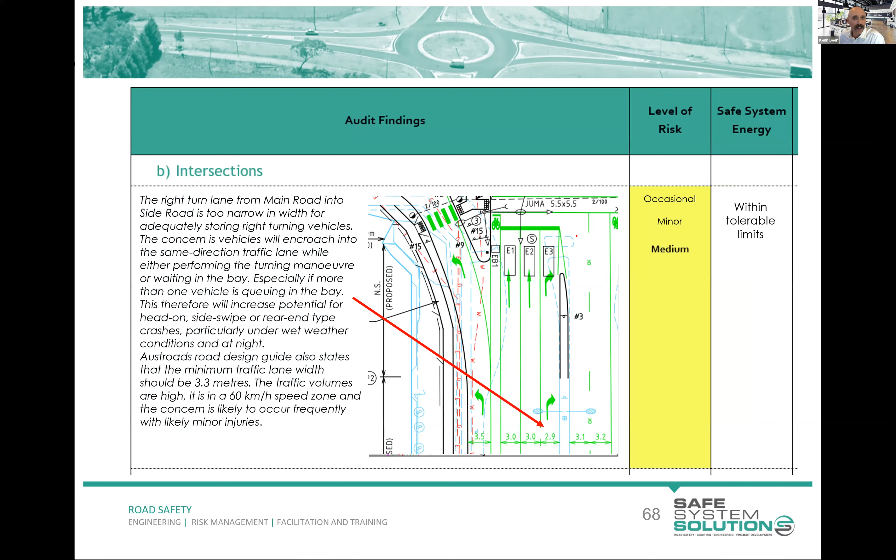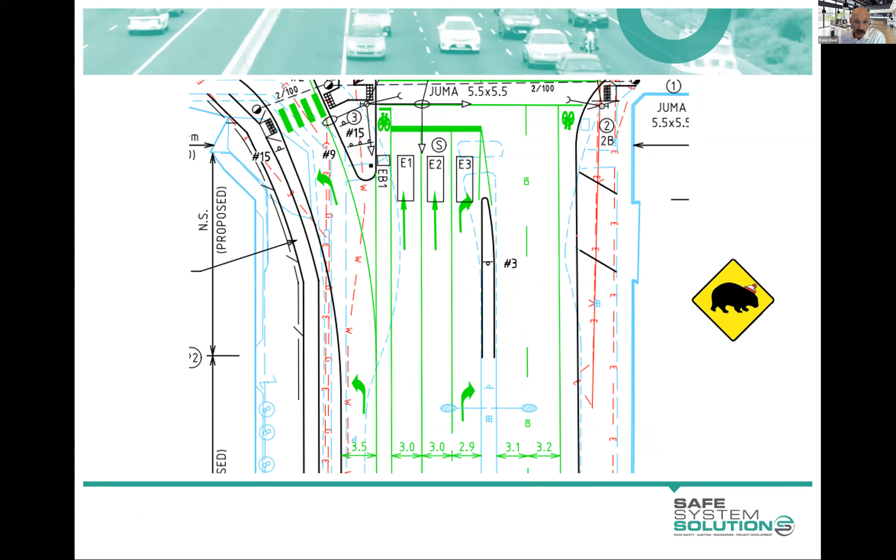Sorry, I'm jumping through that. I better pause there because I'll show you it broken down into those elements in a second. But the issue we're dealing with is, yep, they're obviously highly constrained in this area, and they've gone with a 3.5 meter left turn lane, 3 meter, 2.9. It's all squishy.

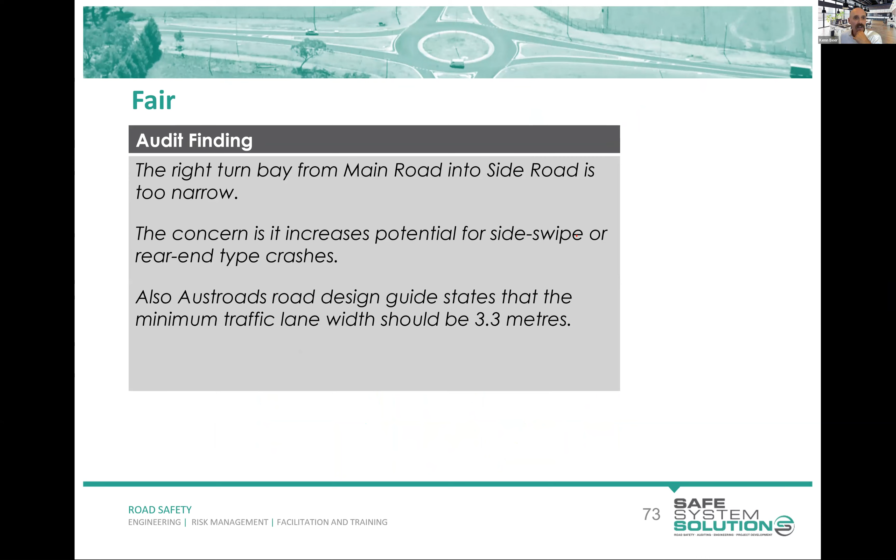So the wording of these findings is important. If you write this in your audit report, "right turn bay is too narrow," you're probably going to have to resubmit your audit report to RSS because you won't be getting your 80% requirement. You might just scrape through on something like this: the right turn bay from the main road to the side road is too narrow, increases potential sideswipe and rear-end crashes, and Austroads looks for about a 3.3 meter width. But this is going to get you really, really high marks.

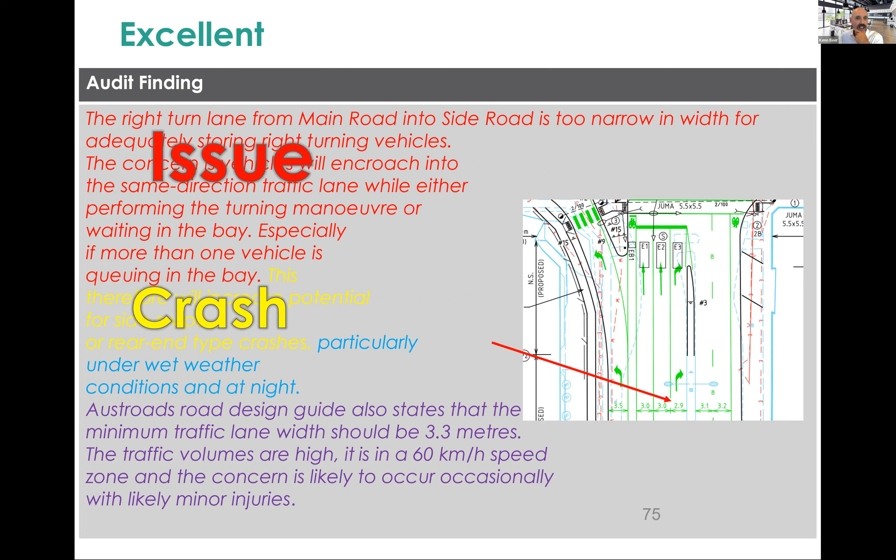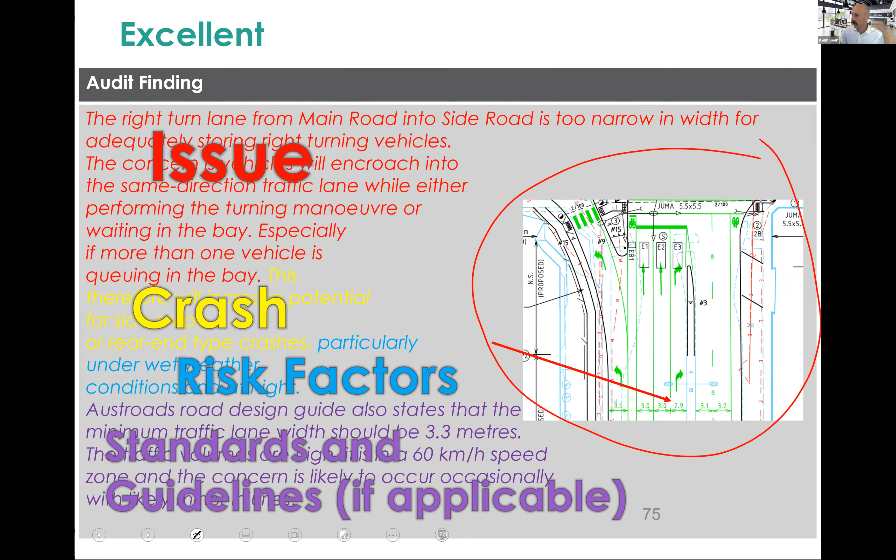And it's because it's got those things. It's got the issue well defined. It's got the crash specified. It's got risk factors, it's got standards and guidelines if applicable, and it's got the diagram or the snip pointing us exactly where it is. We try and follow the formula of the recipe, and we do well.

There are lots of things here that a road safety audit is not. It's not a check against standards or guidelines. We've established that. We don't use road safety audits to assess the overall merits of projects, and we don't try and justify one project over another using audits. They're there to manage the risks within that project. Safe system assessments are better for that.

It's not replacing general quality assurance that should happen, and it's not a crash investigation. It's not part of a routine cyclic inspection or asset management inspections. And we really don't want to just apply it on the big high cost projects. It should be in other projects as well. We don't want redesign of projects where we can't make that very clear safety link. And certainly you want to stick to only safety issues in your audits.

It's not a workplace health and safety audit. If you're doing a traffic management scheme audit, you're thinking not just about safety of workers, but about safety of the traveling public. And in fact, if the workers are digging in the wrong way or something like that, and you have an occupational health and safety concern, absolutely raise that with the site supervisor as a moral obligation you have, but as a road safety auditor, that's not part of the audit.

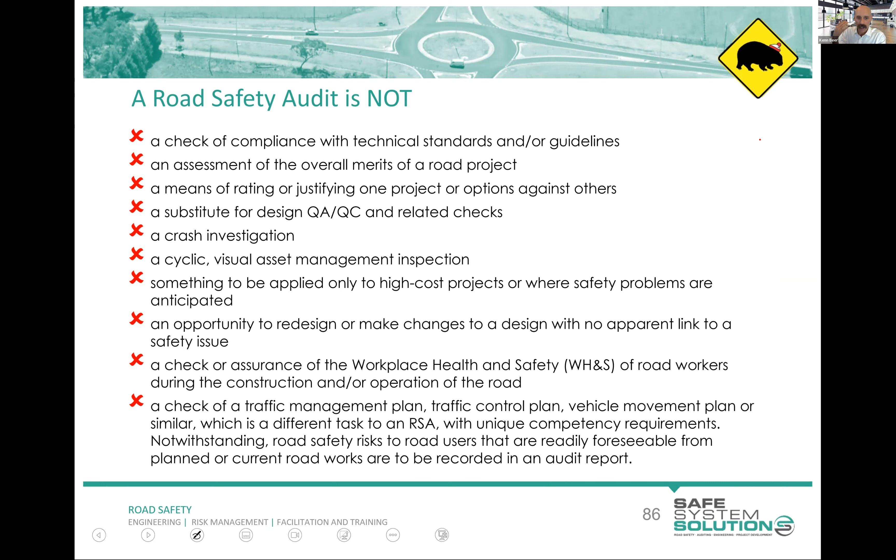And the road safety audit of traffic management plans and traffic guidance schemes is probably the one where people most gravitate to just checking: is the taper length long enough? Is that the correct sign? Have they got the speed sign closest to the road in the multi-message sign? Tick, tick, tick. That can be part of it, but a road safety audit of that scheme is far bigger and wider than that.

And New South Wales maybe has some justification for not having controls or solutions as part of it, because the absolute primary purpose of the auditor is to find that problem. Solving it is an added benefit, and it's generally seen as helpful that somebody with the background knowledge is providing some ideas. But problem finder is what audits are.

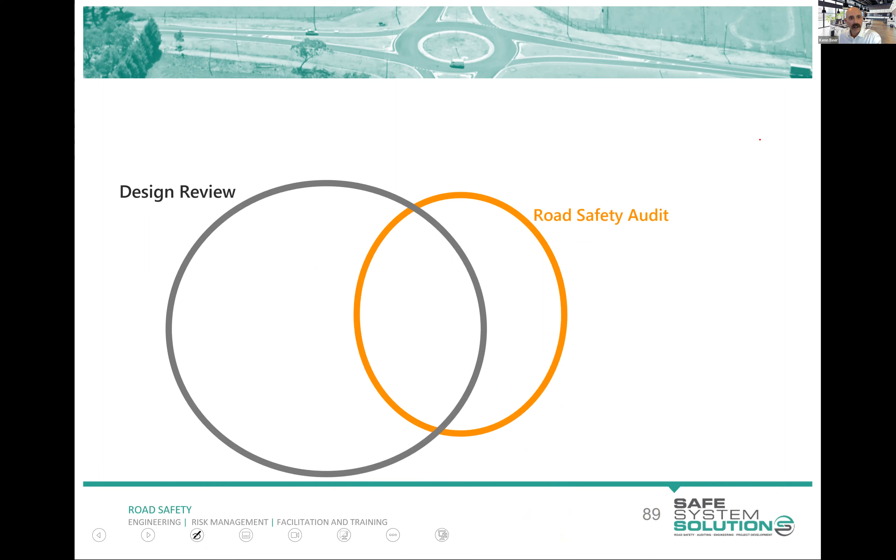And we see a bit of overlap between techniques these days, between design reviews and audits, between safe system assessments, safety in design, and Disability Discrimination Act audits. So they're all starting to overlap, and hopefully we start to combine these sometimes and get rid of a little bit of red tape on infrastructure projects. But at the moment they're all serving slightly different purposes and presenting things in slightly different ways. So they all remain as options.

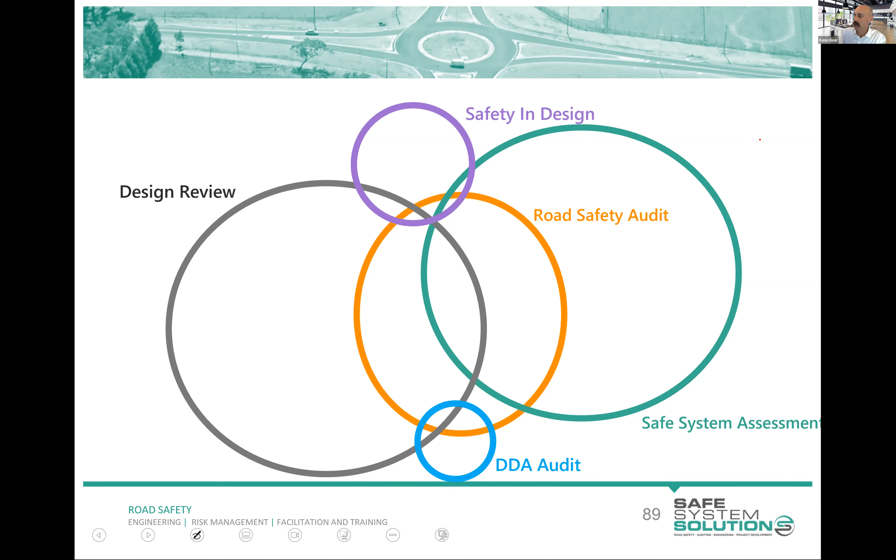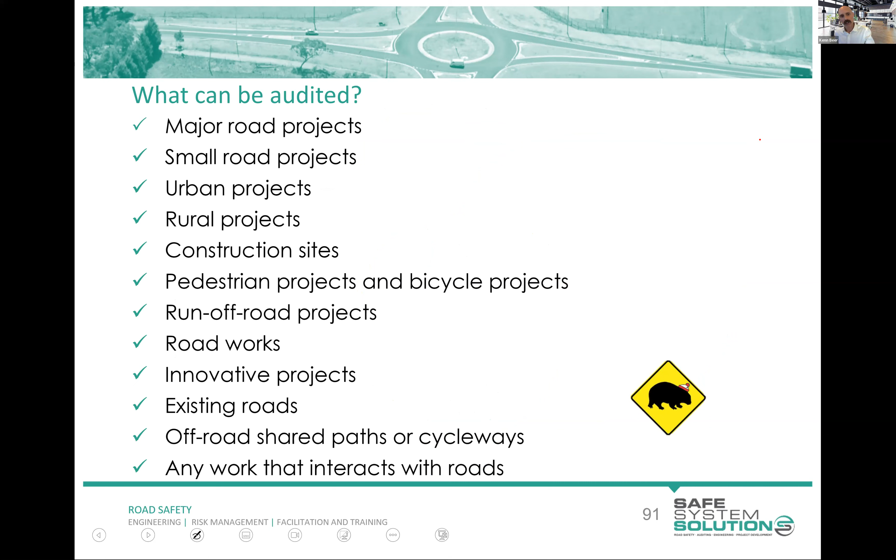So what can be audited? Well, anything that interacts with the road environment or road-related area: big projects, small projects, work sites, innovative projects. It provides a pretty nice process to follow to reduce risk.

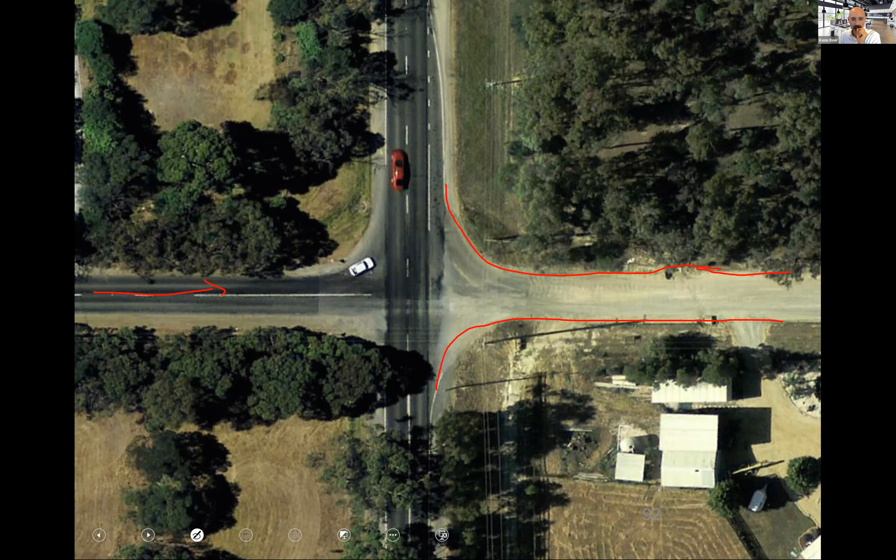And a driver approaching, yep, so we're getting some good answers coming in. A driver approaching here, before it was built, was seeing a very changed road environment. In fact, it actually accentuated the intersection. It made it quite clear. Yes, so Nicole's now written it in. That's it. Without that, when it's sealed, it runs and looks very much like the road continues. You get a real visual to see.

So this is the new side. Don't worry about the burnout marks. You can see their curb and channel and the like. But here's the old approach, and you can see it now continues straight. It's sealed. It's got the power lines. It's got the straight alignment through. Everything is sort of working there for that see-through effect to be enhanced.

And unfortunately, there was no audit done. There was nobody there to point this out. And I suppose no recommendations to do any of the things that could be done, or the designers and project managers aren't coming up with their own things, such as splitter islands or offset tees or advanced warning signs or rumble strips on the approach, or the raft of things we know, let alone going to some more primary treatments such as a roundabout.

And it is a roundabout now. 10 years, 12 years later, and lots of our community seriously injured and killed at this location, it has finally got to a roundabout. Yeah.

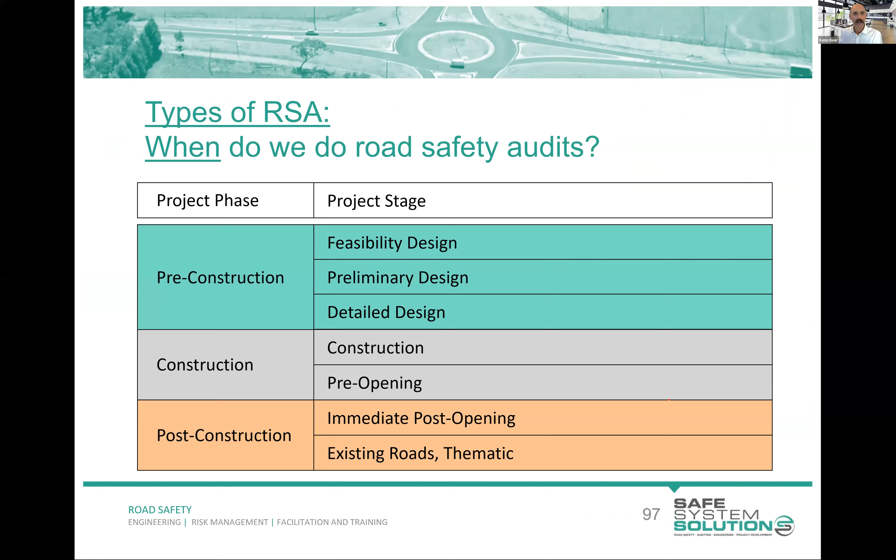Okay, I'm going to actually pick this up next session, the types of road safety audit, because I need to give you an assignment. And I'll take any questions at the end just before we go. So, actually, no, sorry, I'm going to share my screen again because I can describe the assignment better using this, and I'll come back to that, don't worry.

Okay. Your assignment is you are going to be given a random road safety related topic, road design topic. We want you to have a look into that, do some research. Now, we don't want extensive research. We don't want you spending hours and hours or days and days on this. We want you to just get a feel for the issue. And then we want you to create something. And it can be something fairly quick.

It can be a quick fact sheet. It can be one PowerPoint slide where you've put in some information and some snips. It could be a cartoon. It could be a little video. It could be whatever you want. We want it related back to road safety and ideally road safety auditing as well. And we will give prizes to the most creative presenting of the information, like very creatively putting a cartoon together, most technically sound information, and most engaging. So 3 prizes will be given out.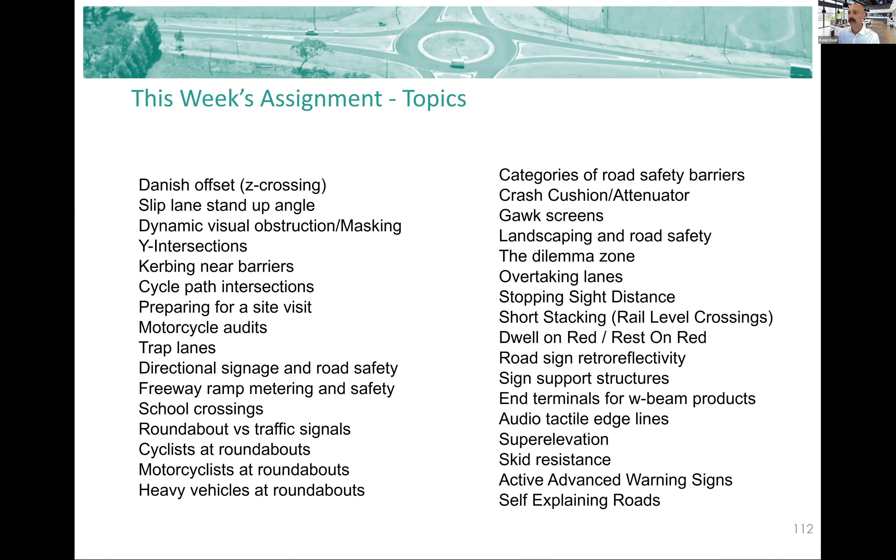So I'm actually going to change my screen because I've got the super random generator of topics going here. Hopefully you can see that. Now I'm going to generate some topics here because it randomly generates. Here we go. 3, 2, 1. Okay. So they're your topics, and I'll get somebody to email this to you in case you're not jotting it down right now. But you can see there we've got anti-gawk screens for you, Madeline, Justin, kerbing near barriers. And we've got poles on school crossings, and the list goes on.

If you're having any trouble with finding information about this, remember it's just a short: this is what it is, and this is how it can impact road safety. And maybe as a road safety auditor, you want to look at sight lines past gawk screens, and how that works for entries and exits. There's a little clue for you from work sites. But if you're struggling to find information, get in contact. We can point you at some stuff. A bit of Googling on all of this will be fine. So let us know how you go.